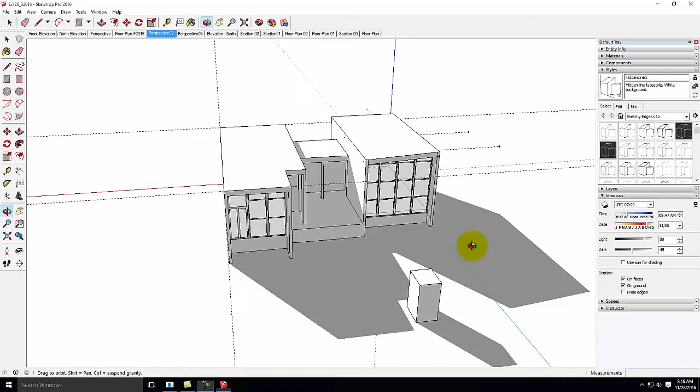So today we're going to start talking about doing sections. And sections essentially are critical because we're going to slice through the building in some key way to show relationship of spaces. And all too often as young designers, architecture students, etc., you focus on the plan. It's easy to conceptualize the plan. It's easy to count the square footage of the plan.

When I asked you all to design a building, your cabin, this building, the first thing that you did was draw the plan, correct? Okay, so it's automatic that you think that. The further along in your architectural career you go, the more you actually start designing in section rather than in plan. And it seems a little counterintuitive because you're like, whoa, wait, why would I do that? I need to know where the spaces are and how they lay out next to each other.

And of course you need to know that. But what sections do is they show us as architects what it's like to be in a particular space. We never experience a building from a plan perspective. We don't think about that part of it. If we're standing in this room, for example, we see the section of the building. That's the kind of spatial relationship that we have.

So if you have a building that has an overlook from one level down to another level, or one level out to a view, or something like that, showing that particular room or the ceiling height is critical to really understanding what it's like to be in the space and what it's going to feel like to be in the space. So section drawings are really one of the most critical drawings you can show in an architectural design or a presentation. Those are the ones that your reviewers are going to care about because they explain what your building feels like to be in.

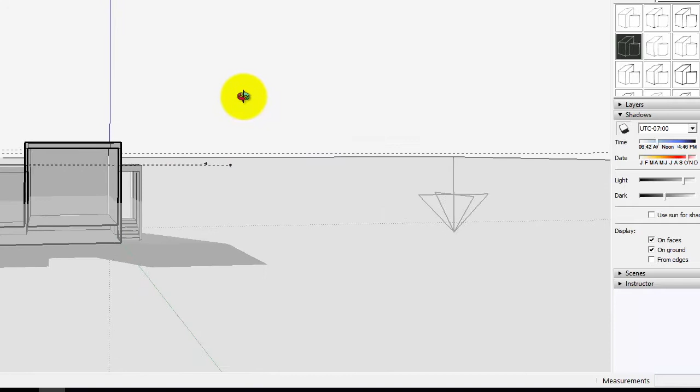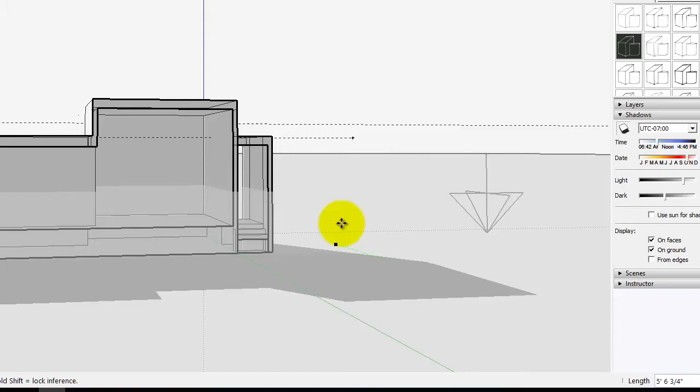Okay? This particular section view certainly gives us an understanding of this side and the main room, living room on that side of the building. If I move that section back a little bit further, it would cut through the hallway, and we get an idea that the main room is connected to the hallway, which is then connected to the room. But I also end up with some kind of awkwardness over here because it's cutting through a closet. It's not really showing the building. So you have to think very carefully about where in the building you want to cut.

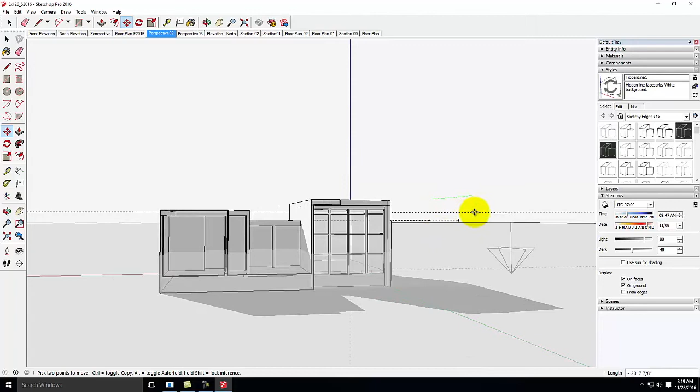Right? So there it's the kitchen, the bathroom, and the bedroom. Okay? Again, not that exciting. Okay, but not super exciting. And I could pull myself back out to find some happy medium, so maybe something like this. This wouldn't be a bad place to try a section. Sometimes it takes more than one section to decide which one's right. So I'm going to delete that one for a second. Maybe not. And I'll try it again. I'm going to go ahead and delete. Well, we'll leave the plan section there for a second.

Let me try taking the section the opposite way. All right, so let me take the section, and this time I'll move over onto the back, and I'll take the section looking this way. Let me go ahead and move this section toward the building. Okay, so now in this context, we're seeing out toward the view here. We're cutting through the stair, kind of the entry level. That's kind of an interesting piece of the building. We're still cutting through the bathroom, but we're seeing part of the bedroom with the closet. So this could end up being okay.

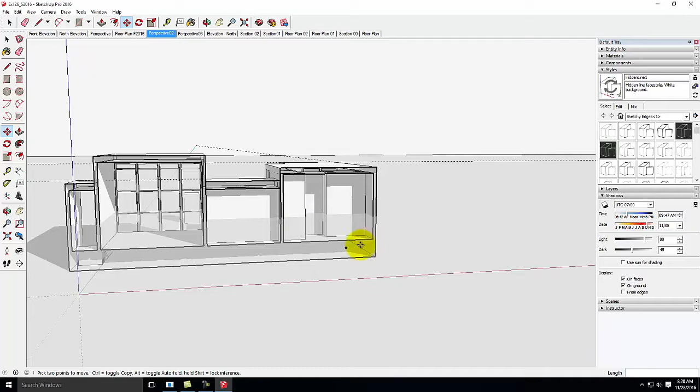Now, I don't have all the detail. I don't show the closet there. So if I had more detail, this section would be a little bit better. So just by flipping the direction, which way I'm looking, this section starts to be a little bit more interesting. Okay? If I pushed it forward still, we could get to a place where we're seeing the bedroom. Let's see, right there. We're seeing the bedroom part here, and we're seeing the main room here. But we really don't have much of the main room left. No room for furniture or anything like that. So it might not be the ideal place to put the section.

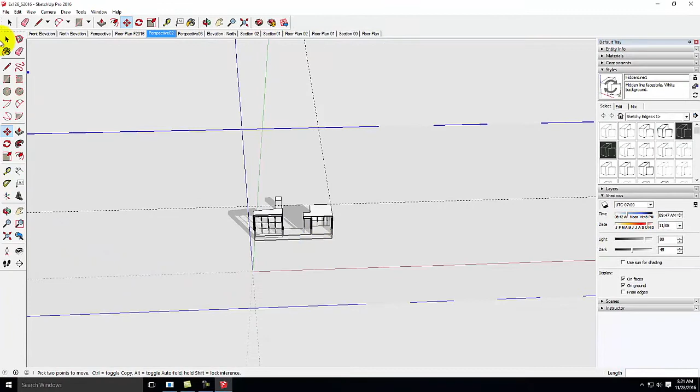I could also take my section sideways through the building. So let me go ahead and pull this sideways. And one of the nice things about SketchUp is we can dynamically go through and decide where this section is going to be. In my opinion, Rhino's a little bit better at doing sections.

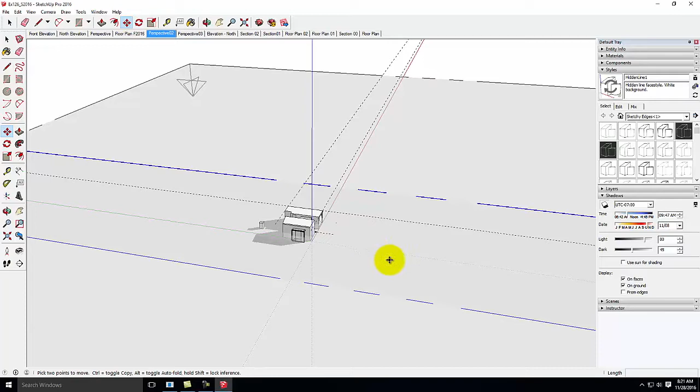They're a little bit more complicated, but you don't get this live preview as you cut through the building. And the live preview, certainly at an early design level, can be very useful. So here in this context, we're cutting through the building, and we're seeing there's my whole living room. Right? Now we're cutting through that bathroom and hallway, and then we can end up in the two bedrooms, looking at the two bedrooms. Okay?

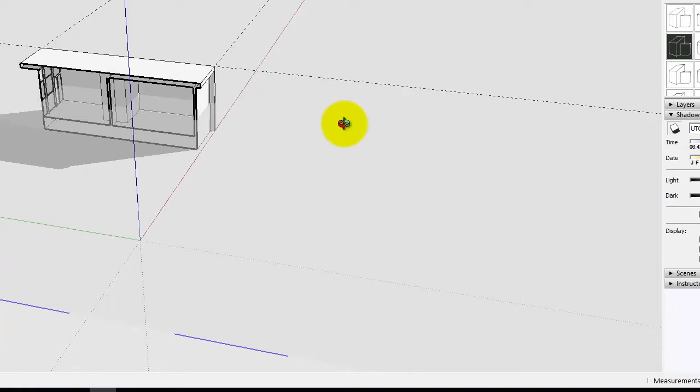So maybe something like that is going to show us the relationship of the two bedrooms and how they work together. So when you're thinking about your section, you want to move around and you want to think about which section is the right view, which is the one that I want to show in the context of this building. So let me move back a little bit, and I'll take a section through the main room like this as an example section. Okay? And again, I'm picking this rather arbitrarily, but you could pick a different section.

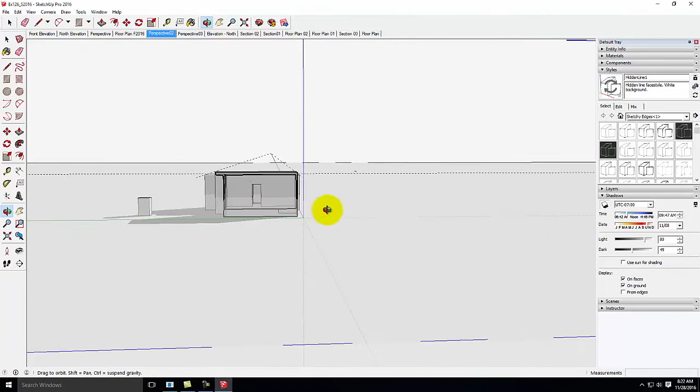You can pick it in any direction you want. I wanted to pick one that was distinctly different than the elevation view for the demonstration purposes. Okay? So I have this view, right, with my section set. Remember, currently it's still in perspective. So I need to make sure that I go up and change. Let's go ahead and turn off my section planes so that it's all white.

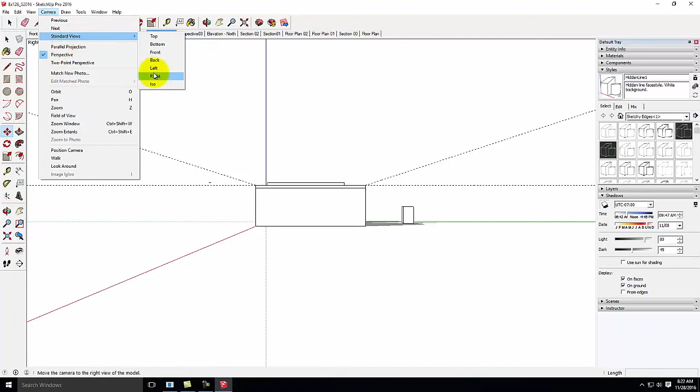And then let me go to my camera, standard views, and I can go to my left or right view. And I forget which one it's going to be. It's probably the other one. Let's try the right view here. Oops. There we go. There's the left view. Okay, let me also change from perspective to parallel projection so that it is, in fact, a true elevation view. And we'll zoom in a little bit so that we can see my whole building.

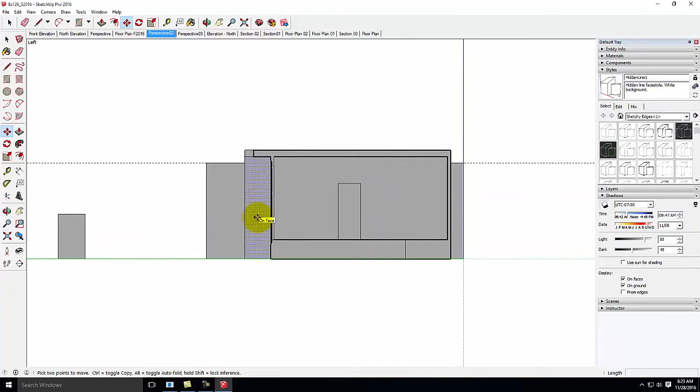There. This piece over here really doesn't matter. That was holdover from when we cut the plan, so I'll go ahead and get rid of that piece. And now we have my building and my section. Now you see that I struck out on this the part about doing the section cut face because it's not installed on your computers and you can't install it without admin privileges. So we're going to skip that part of it, and we'll do it in Photoshop after the fact.

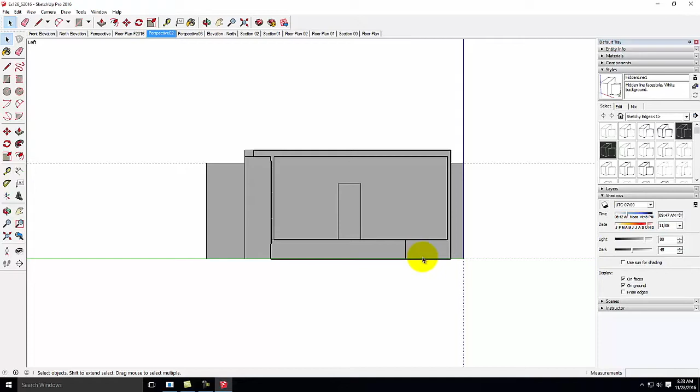OK, so I have this here. I'm going to go to View again. I'm going to turn off my shadows so that I have no shadows. I'm going to go to View. I'm going to turn off my axes. And I'm going to go to View, and I'm going to turn off my guides. So all I have left is just my plain basic lines drawing. This should look very familiar to the things that I've done before. And I'll go to File, Export, 2D Graphic.

And we'll save this into today's folder, which is what? 126. This would be fall of 2016. And this is underscore lines. I'll click on Options and make sure it's still set to be large, which it is. In your case, it may or may not still be in that size. I'll go ahead and say Lines, and then Export. So now I have this.

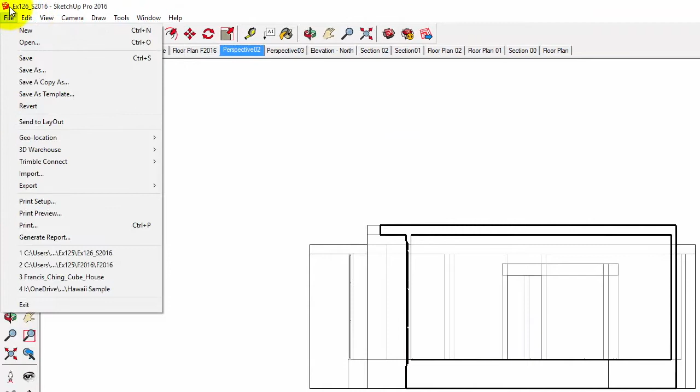Now in this view, the X-ray may be beneficial because we see more of what's happening beyond. So I'm going to go over to my View. I'm going to go to the Face Style, and then click on X-ray. And we see a little bit of what's happening beyond in the building here. We'll go ahead and go to File, Export, 2D Graphic. And I'm going to call this one X-ray. And export. We'll turn back off the X-ray view.

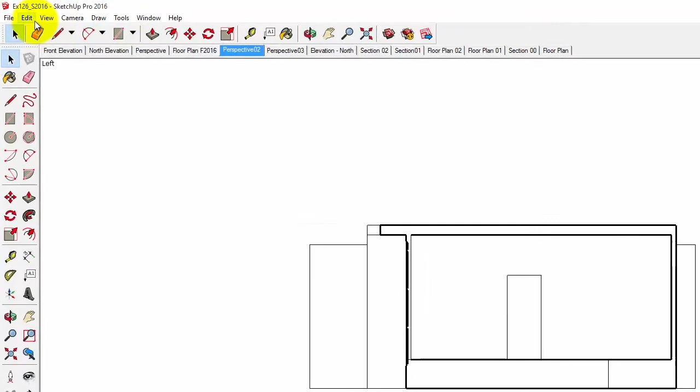And I'm going to turn on the shadows. So we'll go to View and then Shadows. There. And remember, I may want to adjust the time of day or the time of year to see if I can get a shadow pattern that looks interesting. Okay? So something like this looks pretty interesting. The problem is that these windows are cast because I've cut this half of the building open. Right? So realistically, that wouldn't be in shadow.

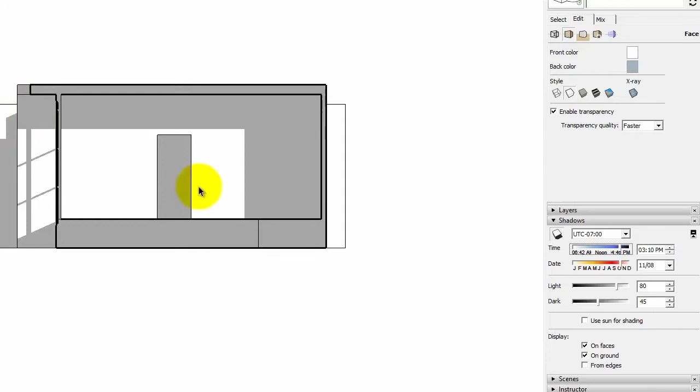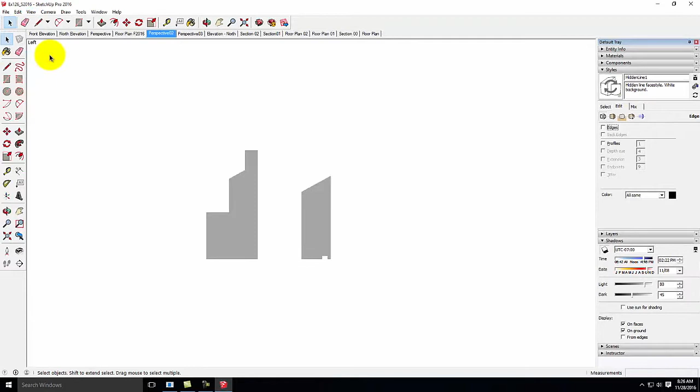The rest of this would be in shadow. So it's not bad, and it's certainly better than it was before. So maybe something like that will look pretty good with this little pattern on the wall. Okay? So then I'll go back to my edge settings over here. I'm going to turn off edges. And let me go to View. And I'm going to turn off section cuts. Hold on a second. I want to see that again.

Yeah, I'll go ahead and turn off section cuts. This piece isn't going to matter. This is the shadow that I'm interested in. And I'll go ahead and go to File, Export, 2D Graphic. And this is going to be Shadows. Click Export.

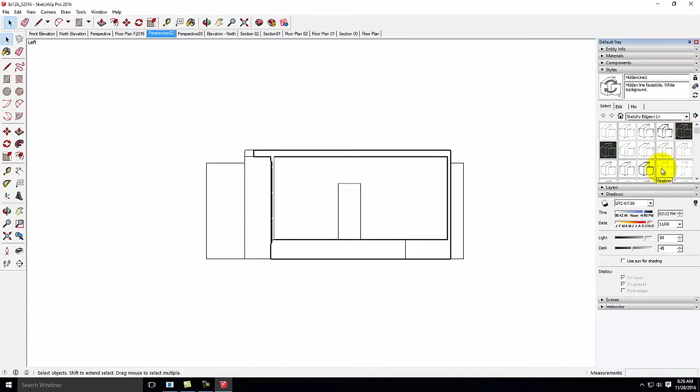Let's turn back on my edges. Turn back on my section cuts. There we are. And now I'm going to go back and turn off the shadows. So we'll go to View, and I'll uncheck Shadows. And we'll go back into my sketchy edge styles. And we're going to pick the pen gray right there.

But I do have to go back and uncheck section plane. So it goes white again, and then uncheck the guides. There it is. I'll go to File, Export, 2D Graphic. And this was my pen gray. Export.

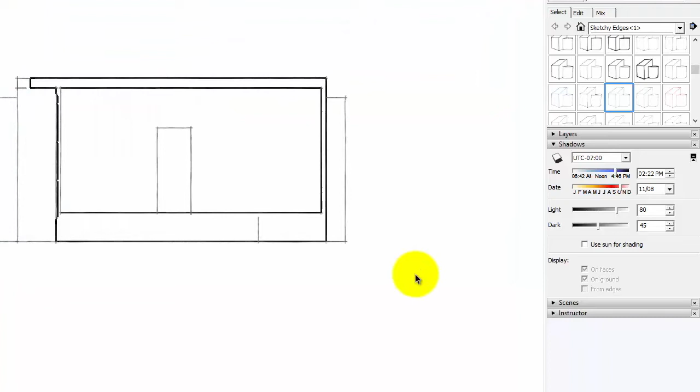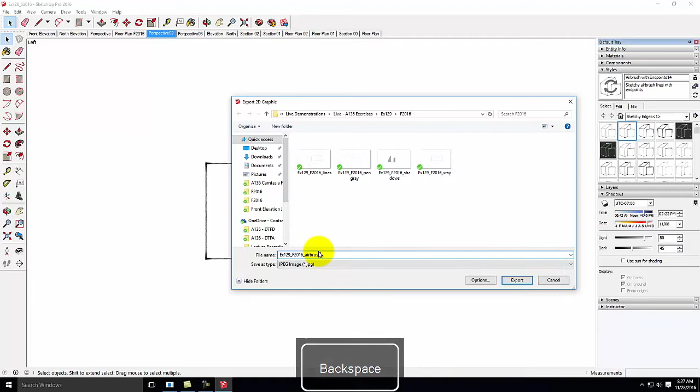And then I'm also going to use the airbrush with endpoints right here. View, uncheck section planes, uncheck guides, and File, Export, 2D Graphic. So this should seem very routine by now because we've done it over and over again. Oops, this is airbrush. And I'll export that as well.

Now I did do one that was colored early on that may help distinguish the background or the foreground. I actually don't like that one. Let me go back to default styles. Yeah, something like this. This is just going to allow me to help pick certain regions.

So let me go back to Edit, edge settings. We'll turn off the profile so we have just the colored regions. Let me turn off the guides, the axes, and then I'll export 2D graphic. And we'll call this one color. And that could just help me select, say, the sky versus the ground, or something like that. OK, so all of those are now done and saved.

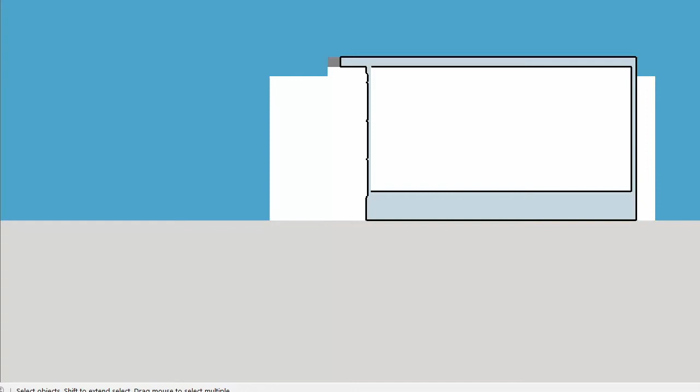Now I'm going to move over into Photoshop. So let me go ahead and open up Photoshop here. All right, Photoshop's open. We'll go to File, and then Open, and I'll open that first line drawing. Right there as lines. Open. There it is. And then we'll place in everything else.

So I'll go to File, Place, and we'll bring in the airbrush. Confirm, File, Place. We'll bring in the color. Confirm. File, Place, bring in the pen gray, we'll go File, Place, bring in the shadows, File, Place, and we'll bring in the X-ray. OK, so I've dropped all of those there. All of the layers have shown up here.

I'm going to spend a moment and do a little bit of organization. So let's take the airbrush and the pen gray and put them up top. The X-ray, the shadows, and the color can be down the bottom. I'm going to right-click on the locked background layer and say Layer from Background, so that it's a live layer instead. And then I'm going to go through and rename these.

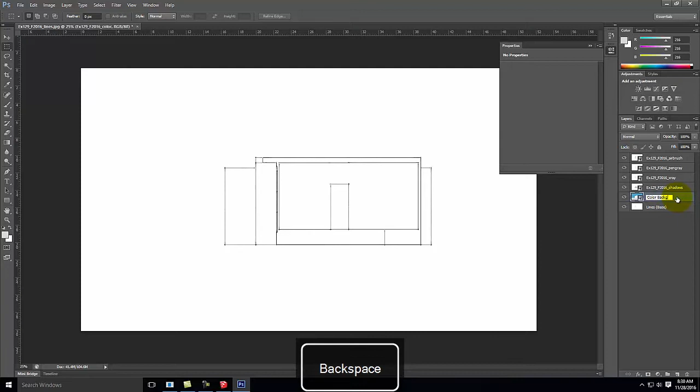Remember, when we start to have lots of layers, it's helpful if I have named the layers so that I can easily go through. So let's go ahead and call this one Lines. And then we can rename these other ones as well. So this would be Color. This would be Shadows. This would be X-ray. Pen gray, and airbrush. Just easier to see those names.

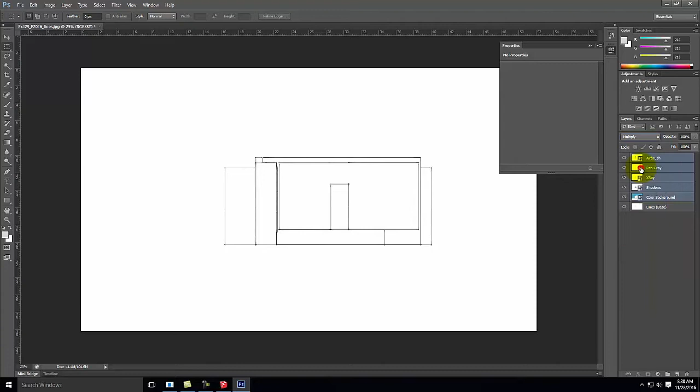OK, so now airbrush through colored background, all of those need to be changed to be multiply, so that we're going to shine through and see all of them as semi-transparent. We'll turn off the airbrush and the pen gray. Let's turn off the color for a second, and let's start with just the shadows view.

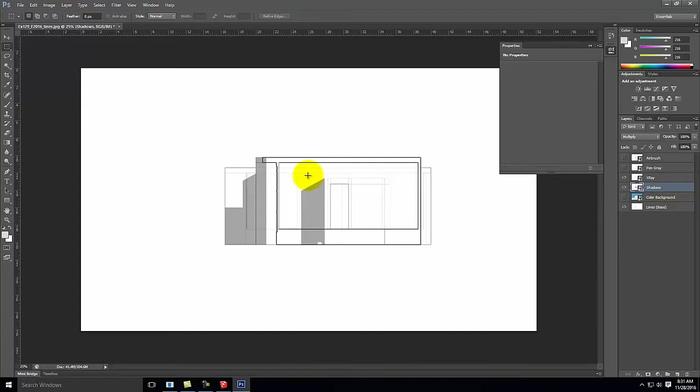OK, so with the shadows, we have to make a few corrections on the shadows layer. So I'll make sure that shadows is highlighted here. I have to get rid of that piece, because obviously that shadow doesn't exist. It's a smart object, so before it's going to let me, I have to right-click and say Rasterize Layer. And then I'll be able to get rid of that piece. Then I also, press Control+ here for a second, I need to fill in this shadow into this area right there. So we'll make a little selection.

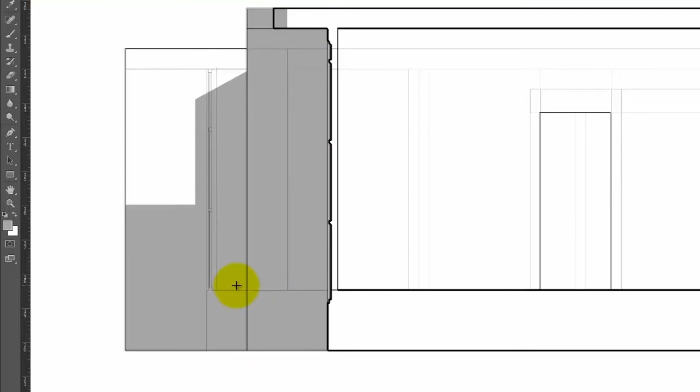I'm going to use the paintbrush tool, but I need this gray. So I'll use the eyedropper tool to select that color of gray. Then I'll switch to the paintbrush, and I'll paint that piece in, because all of that is under the same little bit of shadow. I can also get rid of this little piece right there, because that little piece is part of the section cut.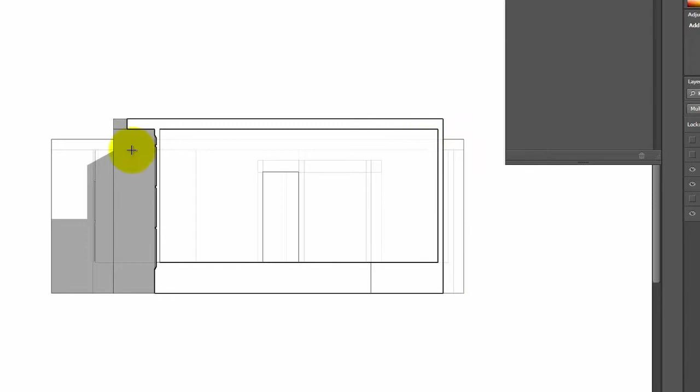Okay? So now I've corrected the shadows, because that was an easy stage to correct the shadows. I don't have any shadows on the back half of the building because of the way the sun is shining, but I do have them right here on the front half. So that's good. And I can come back and do a dodge and burn on those shadows and touch them up. But I want more in the drawing before I worry about that just yet.

So let's think about how the building hits the ground. And so in this sectional example, the ground becomes very important. And I have the building currently kind of floating there. So we need to adjust that. So let me go ahead and create a brand new layer. And I'm going to call this layer Ground. And we'll move it up to the top of the layer stack so it's in front of everything else.

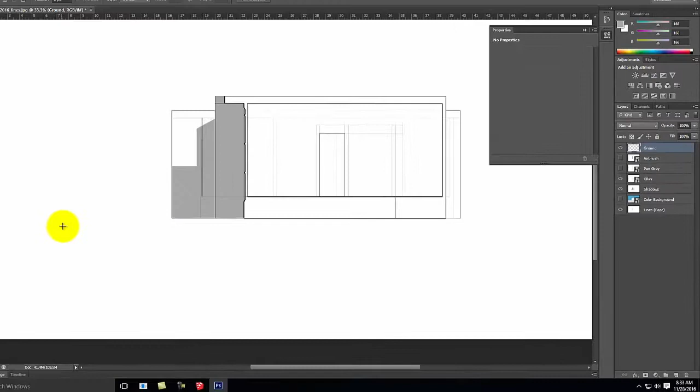So because this is kind of on a hill, I need a kind of a natural slope that's going to go down here. Furthermore, I have enough of a foundation in the building to where it's going to be higher in the back and slope down toward the front. So I need to go ahead and make a selection for that. And I'll use the lasso tool right here to go ahead and draw that. Let me zoom out a little bit so I see everything.

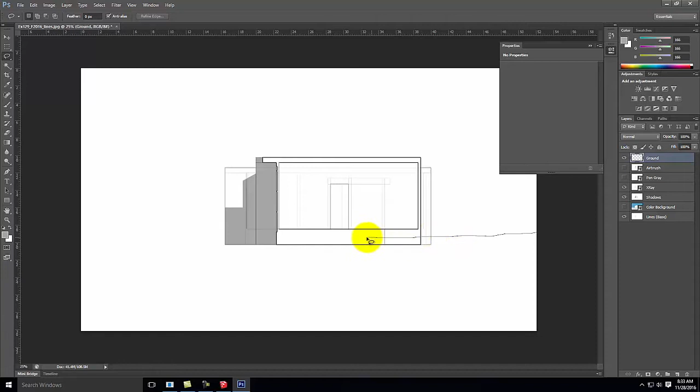And I'm going to start over here on the side. And I'll draw a line that goes along here that slopes down. And then I'll draw it all the way around the border and wind up right back there. So I end up with that kind of sloping line that's going down. And you see how it kind of slopes its way down. That's what I want.

Let's go ahead and paint that in with a color. So I'll use the paintbrush tool, and I'm going to paint not with the gray, but with a much darker gray. Actually, let's go all the way to black. Okay? And I'll go ahead and I'll paint that in as black at the bottom here. We can always change that to be a different color using one of the adjustment layers after the fact. So I have that nicely filled in.

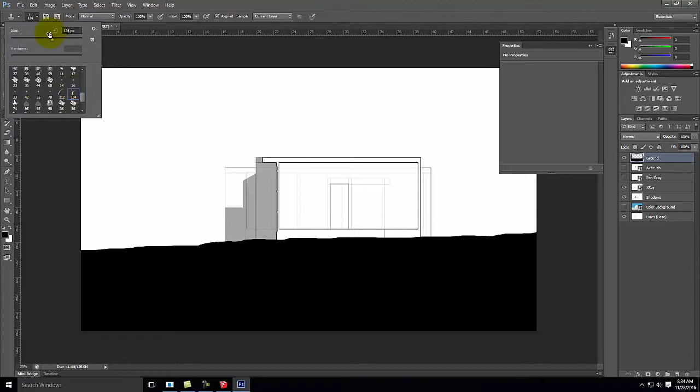That represents the ground. But once again, I'd like there to be a little bit of texture on the ground. I'd like there to be some grass. So I'll use the grass brush using the clone stamp. My grass brush should be right there, 134. And I'll probably have to adjust the size a little bit. So let me zoom in.

Now remember, as I do the grass brush, I hold down Alt to copy from, and then we start. Looks like my grass brush needs to be a little smaller, and then we can go ahead and start to create the grass that's here. All right, I may have to reset by holding Alt where I'm copying from. There we go. Let's move up toward the building.

All right, so I'm not going to worry too much about what's happening in the building here, because remember, I'm cutting all the way through this building. So because I'm cutting all the way through the building, I'm going to go ahead and just skip over to the next side of the building, and I'll do this last piece of grass. So let me hold down Alt, and once again, we'll copy along here. Like that.

And we're working our way up into the building here. Let me hold down Alt, copy from over there, and we'll finish this off. Right, like that. So I make sure I go all the way to the edge. And there may be a few little pieces that you can go back and touch up a bit. Let me press Control-0 so we can see the whole thing. And that essentially softens up the ground quite a bit and makes it feel like it's part of a natural field or something.

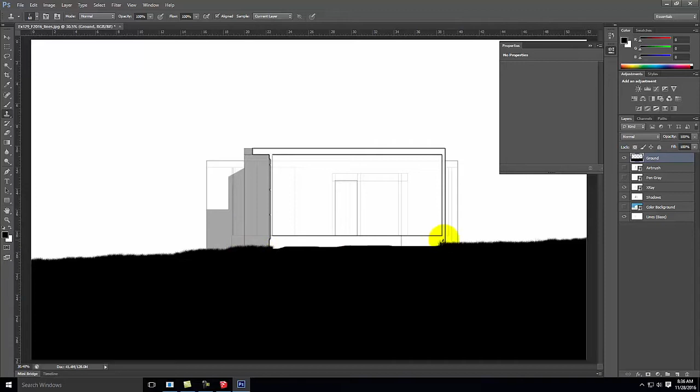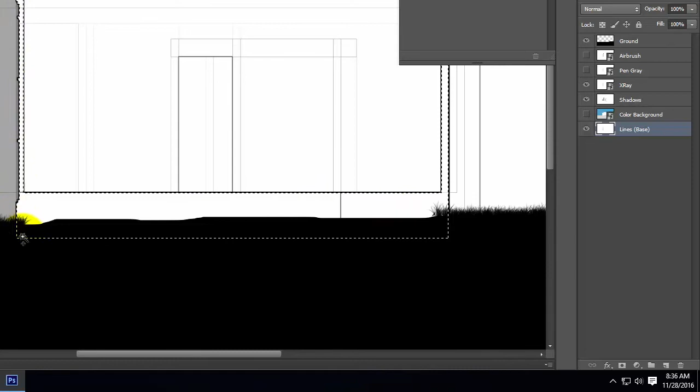Now, because I've cut through the building, I want to apply the same black bottom to the cut of the building. So let me go ahead and I'll use the magic wand, and I need to make sure that I'm on the base lines layer here, and I'll select the inside of the section cut. I'll hold down Shift. I've selected all of the inside there. I'll move myself back up to the ground layer. I could also create a brand new layer for clarity and call this section cut.

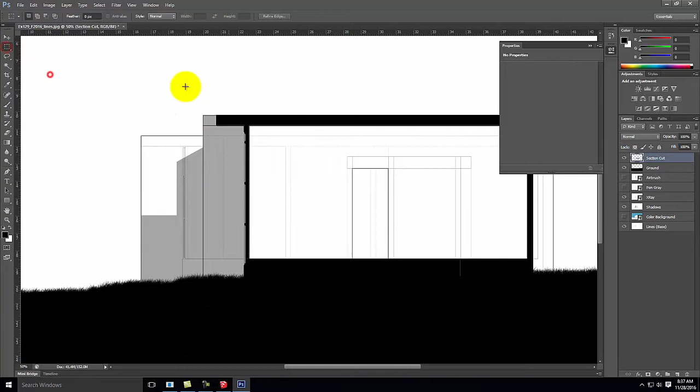And I could then paint inside the building here as black. So now if I step back, Control minus here, we can see that I'm really identifying what's been cut through with this dark black color. Okay? And it's possible that the black ends up being a little bit too strong, but remember, we can apply a hue and saturation adjustment to change that black. I'll show you that here in just a second.

Let me go to Layer, New Adjustment Layer, Hue and Saturation. Okay, all I have to do is on this lightness scale, I can adjust and make that gray to black, whatever the right value is. Okay? Now, this happens to be applying to the whole layer stack. I can tie it to specific layers if I wanted to, remember. Control-Alt-G ties it just to that one layer.

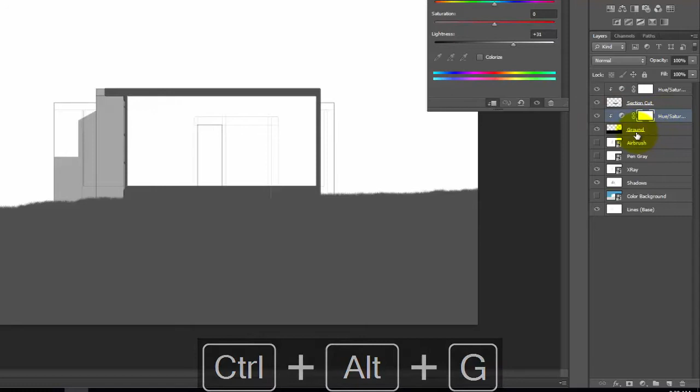I could duplicate this layer, and I could apply that, Control-Alt-G, just to the ground layer as well, if I wanted to. Does that make sense for how I made those changes? For right now, we'll go ahead and turn those off so that we're back at the black layer, and we'll keep working from here. Okay, so I have those already established nicely. I have my shadow established the way I want.

Let's start to think about what the inside of the building is going to look like. So in this context, the inside of my building is a concrete wall. At least that's how I envisioned it. So I'm going to go ahead and find a concrete texture to put as that wall. So I'll go online. Let me open up Chrome here and search.creativecommons.org. I'm going to do a Flickr search for tiling concrete texture. And we'll see what I come up with.

Okay, so maybe something like this. This happens to be some stone tiles, but it might look good on the inside of the wall. Okay, we'll use that as an example. I'll go ahead and download this in the original size. Let me show it in my folder. Let me copy it and put it into today's folder. Go ahead and paste this. There it is. I'll go back to Photoshop.

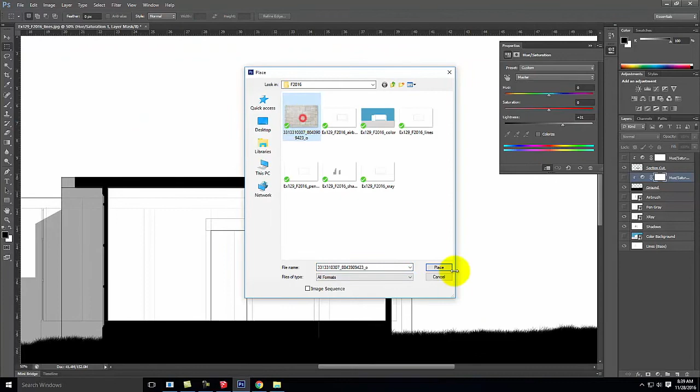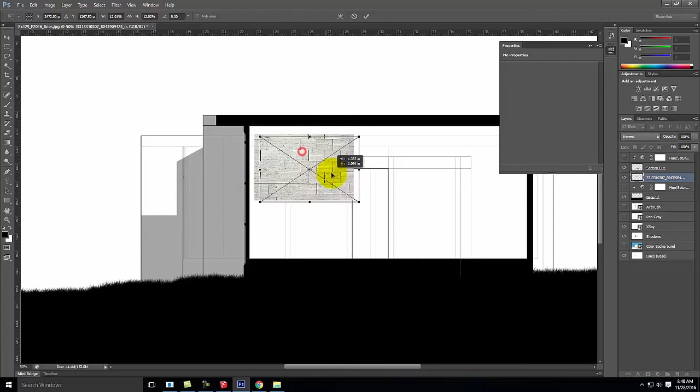I'll go to File and then Place. And we'll drop that into my building here. Obviously, significantly too large, so let's make this smaller. I'm holding down Shift to keep it in proportion. And let's zoom in a little bit. And I need to make sure that the scale feels right, so that those tiles aren't too big. So it's maybe something along those lines. I'll go ahead and say OK to confirm, and there it is.

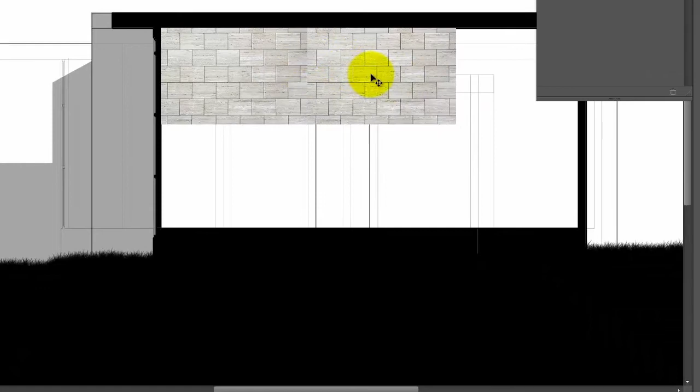I want this to tile and to repeat on itself. So as long as I'm on this layer, I'll use the rectangular marquee and drag a box around my tiles. It just needs to be larger than the tiles. I'll go to Edit and then Copy, and then Edit and then Paste, and I'll get a second copy of that image. We'll bring them together so that they tile, and it doesn't look like these are the best tiling images because the colors don't quite match. But we'll go ahead and pretend that it's OK.

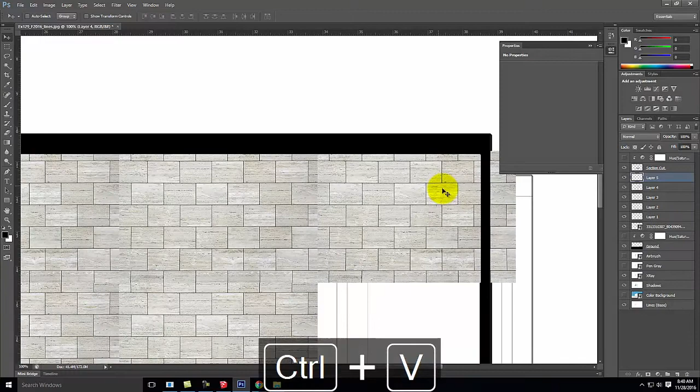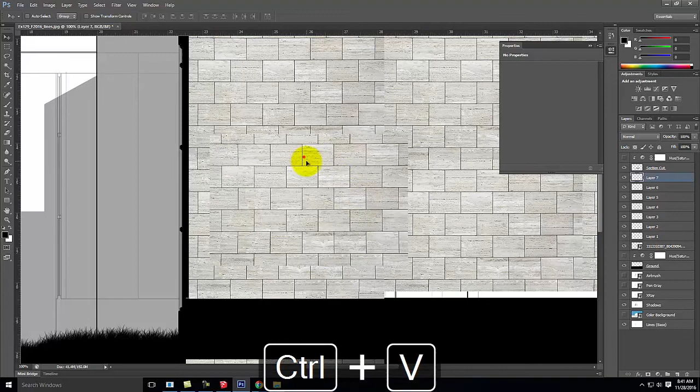Drop that there. Drop that there. And we'll drop this one right there. Okay, so I'm not a huge fan of how those look, but they'll work for what I'm trying to do. Okay, so I have those 6 images placed. Oh, looks like they're not quite tall enough, so I need a few more. There they are.

And you see that it created a bunch of layers. I want all of those selected layers to be merged into one layer. So I'll go up to Layer, and I will go to Merge Layers, which will take all of those and make them one layer. So now that they're all one layer, I'll rename it Tile Background. And then I need to establish a mask on this layer so that these are cut out. So let's turn off those tile backgrounds. We can turn off the section cut.

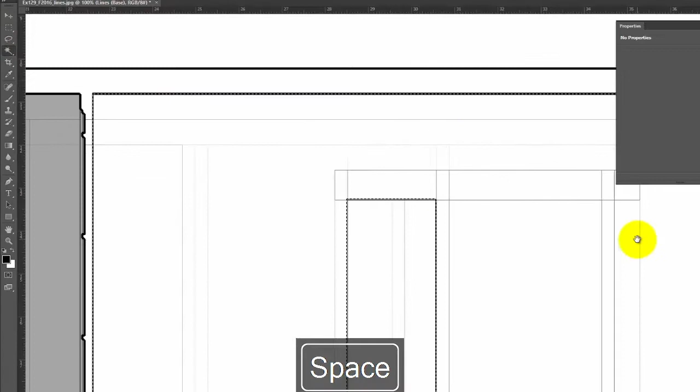We can turn off the ground. Let's move the tile background there. Let's go on the lines layer. Let's go ahead and use the magic wand to select the interior region, which is right there. Once it's selected, I can go back to the tiled background layer, turn it on, and click the Add Layer Mask button. And it will then cut out the image that I have for the background, something like that.

So if I zoom out a bit, we can now see that background, and we can turn on the ground and the section cut so you can kind of see what that's looking like. Okay? Now maybe this is a little bit strong, so let me go on the tile background layer. Let me go ahead and just adjust the opacity down a bit. I have to do it a little bit for what it looks like on the screen rather than what it looks like on my screen here. Yeah, maybe something about like that. So now I have that piece there as well.

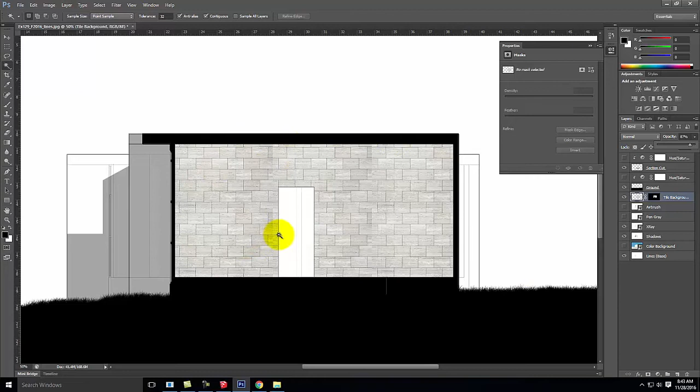Okay? Now, maybe I want to mimic what it would look like to have some lights on in this building. Maybe I want to show what those look like. So I'm going to go ahead and create a new layer here. It needs to be on top of this tile background layer. And I'm going to rename this layer to be lighting. So I have the lighting layer active. Under the blending mode, I'm going to choose soft light. It's one we haven't used before, but I'm going to go ahead and use soft light.

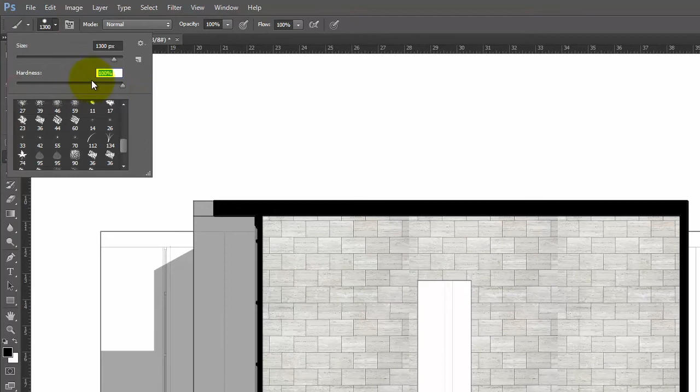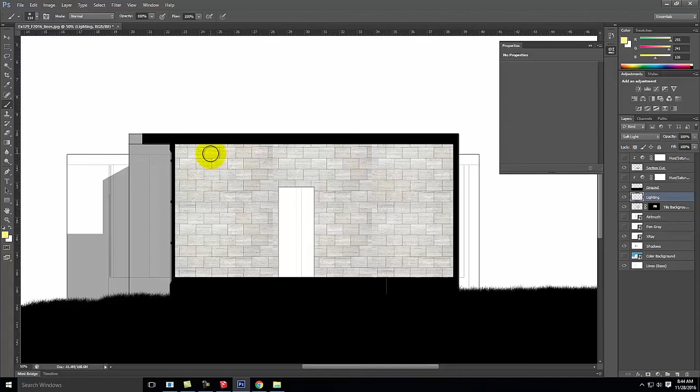And then I'm going to use a brush. And that brush needs to be very, very soft. So sorry, it needs to be all the way here at 0%. And the size obviously needs to be smaller. Then I'm going to pick a foreground color of kind of a yellowish color. So maybe something like that. And then I'm going to start up here by the roof, and we'll do just a single dot. And I'll come down a little bit, and I'll increase the brush size, and I'll work my way down the wall. I'm just hitting the bracket key as I do this to slowly kind of wash the light.

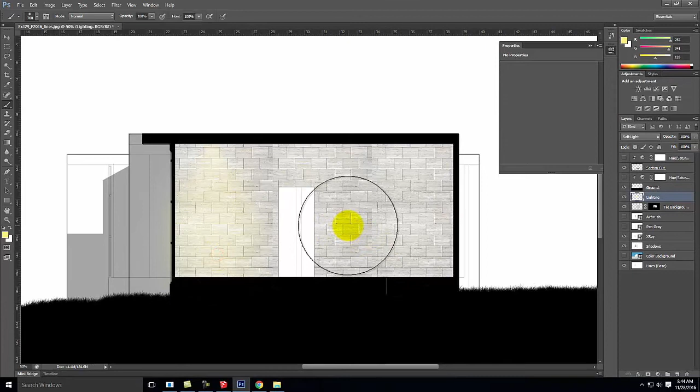And I don't know whether, can you guys see that a little bit? It's really hard. Let me darken the background here, and let me duplicate. Okay, maybe you can see it now a little bit more. Okay, so obviously the background is much darker than I wanted. The key is identifying where the light starts from. Let me go back to my lighting layer. Why are you not changing your size? On the lighting layer.

Right, so the light starts up at the ceiling. We start at a small cone. Then we work our way up as it comes down toward the ground. You guys see how that cone kind of flares out? Because that's what light tends to do. If you look at the back of the room, we have 3 lights in the ceiling. If you look at the wall, see how there's a cone for each light? Right? That same principle happens whenever we create the lighting.

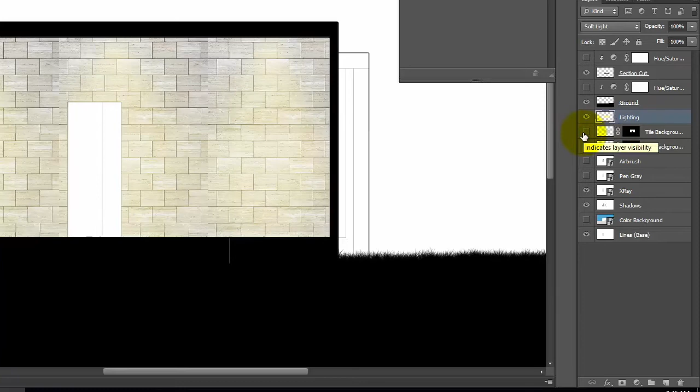So let me do one more example here, right from the center. So we'll start small, and I'll work my way up as I come down. And there we go. So now I have lighting on that back wall. Okay? And again, I deliberately increased the background vibrancy so that it's visible on here. When I do the final version, I'll probably turn that off so that it's a much lighter, much more subtle look.

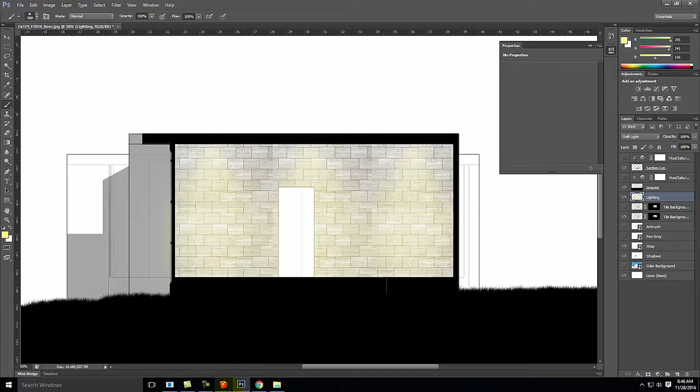Okay? So I now have this. It's probably time to add some people. One of the key elements to creating a good quality section is to put people in it, because that's how we understand a sense of scale. That's how we understand how big a building really is. If you guys remember, we did a bunch of work on the course website earlier in the semester where we cut out people. So yes, I was trying to teach you how to cut things out and do masking, but I also had this in mind so that you could come back and use these and not have to cut them out again.

So we'll go to Resources and then Collage Images. You may already have some available, right? So there's a person here. I can choose, do I want the black and white version, do I want the color version, or do I want the silhouette version? And it depends on the look that you're going for as to which version is really the right version. Right? Let me go ahead and download each. All right, let's put them into today's folder.

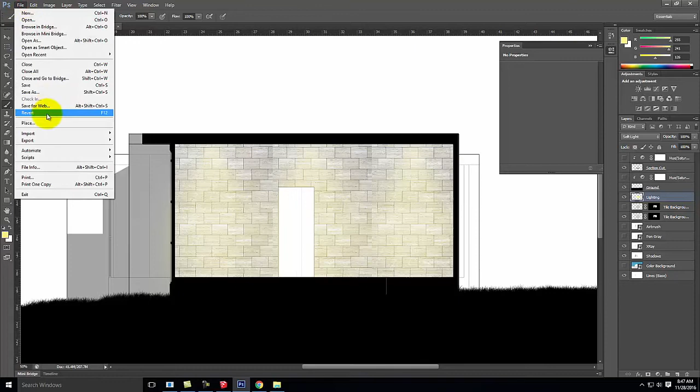All right, so I have all of those, and then I can choose to drop them into this scene. So I'll go to File, and then Place, and again, I have to pick which version I want. So maybe I'll try the black and white version first, right? I know that this is a doorway, so I need to make sure that the person is scaled appropriately for the doorway. So maybe his head should be about there. And we'll make the person a little bit taller. Actually, I think that doorway is a little bit larger than a normal doorway. So that seems about right for the person.

Now I have to make sure, if I look down at his feet, that his feet are at the right place. If he's floating like that, it's not going to work. Right? So I'll move him down so that he's standing on the ground, about like that. Now I picked an image that his feet were pretty close to being on the ground. You have to be careful when you're picking an image that the image isn't too much in perspective. We want essentially an elevation or a sectional view of the person so that they're standing and you're not getting too much of a perspective view.

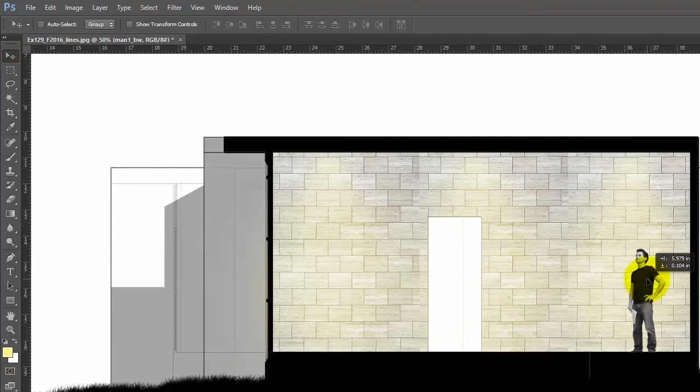So if you're struggling, we'll go ahead and commit to that for a second. There's the person. Seems fairly reasonable, right, standing there. The other option, remember, of course, principles of composition probably dictate that this person should be over here. Maybe something like that. Okay.

If this isn't really looking right, a lot of times you can get away by, instead of using the actual photograph, use the silhouette. Because by using the silhouette, you're taking a lot of the perspective away, and you're now only seeing the shadow of the person. So if you're struggling to get the person to look correct in your view, go ahead and just use the silhouette version. Okay? Again, I can make the silhouette version a different shade.

So let's turn off the first one here, the black and white. I can make the silhouette person black, like the background, by adding an adjustment layer. So I'll go to Layer, New Adjustment Layer, and we'll do a hue and saturation adjustment. I'm going to tie that directly to the man. So Control-Alt-G. And then I will adjust the lightness so that the person ends up being black, which then matches the background. Do you guys see how I did that?

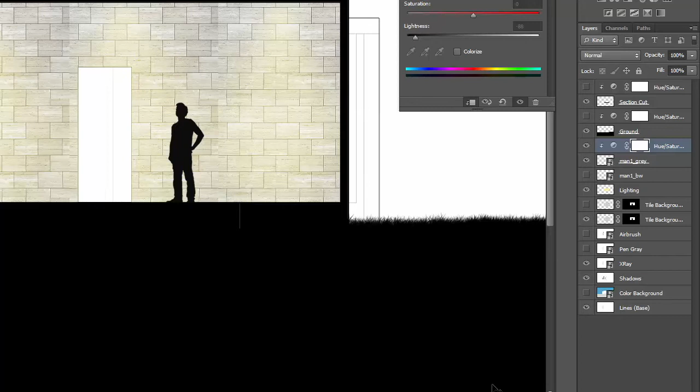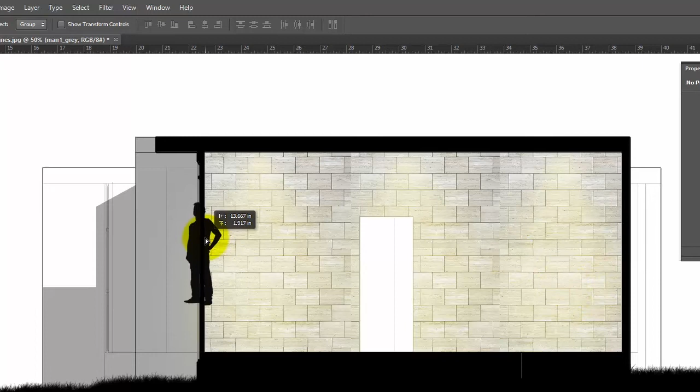Now this starts to feel like it's part of the section cut, which can be beneficial as well. We can move this person, oops, sorry, make sure I'm on that layer. We can move this person over as well. Like that. Okay? It wouldn't make sense for me to have him facing the wrong direction. In this case, I do have some windows, so it might work, but really he's looking toward us more than away from us. So it doesn't quite work in this context, but you want to think about compositionally where he fits as part of the image.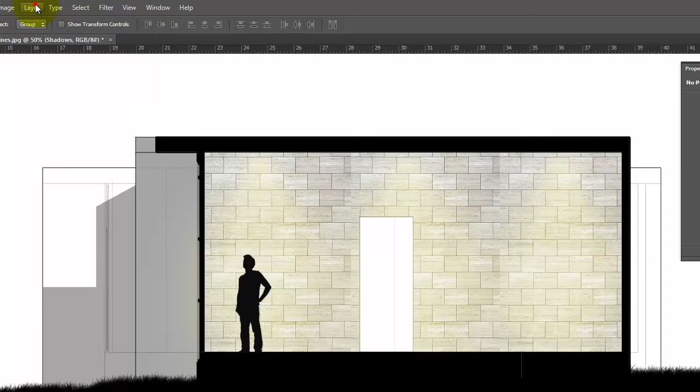Okay? So let's do a little bit of dodging and burning on the shadows layer. We'll come back to the shadows here. We'll do Layer, New Layer. We'll call this shadows D and B. This is going to be an overlay filled with a neutral gray color. And I'm going to tie it, Control-Alt-G, directly to the shadows layer. And then we'll do a little bit of dodging and burning on that. And go ahead with the burn tool here, a little bit larger. We're just going to darken up that edge a little bit more.

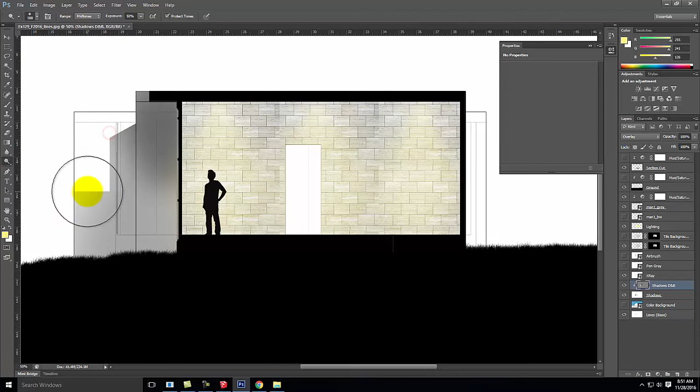Right. Something like that. And we could even lighten up using the dodge tool here. We could lighten up the edges of the shadows just a bit. Something like that. So we just tweak the shadows just a little bit so they're not quite as strong. OK, so I now have those.

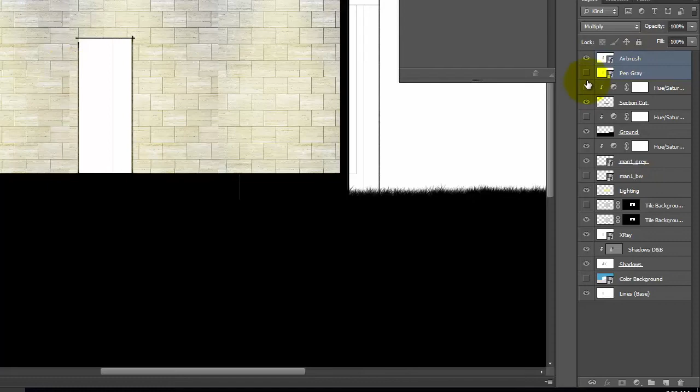I have the lighting on the inside of the building. I have my section cut. I have my people. The last thing would be to add the airbrush and the pen gray, which are the little bit of the stylized version. Let's put the airbrush and the pen gray, however, up on top of the layer stack so they're on top of everything else. Right? They shine over that way. So I just want to make sure that that is part of my overall layout.

By the way, all the steps that I've done are available on the course website under the tutorial section. If you go to Assembly 10.3, SketchUp to Photoshop, this has a bunch of actual images with how they work and what I've done as part of these images. Okay? So we've gone all the way through. The only thing that I haven't dealt with is any kind of background. So I'll go ahead and add the background as the next piece of this puzzle.

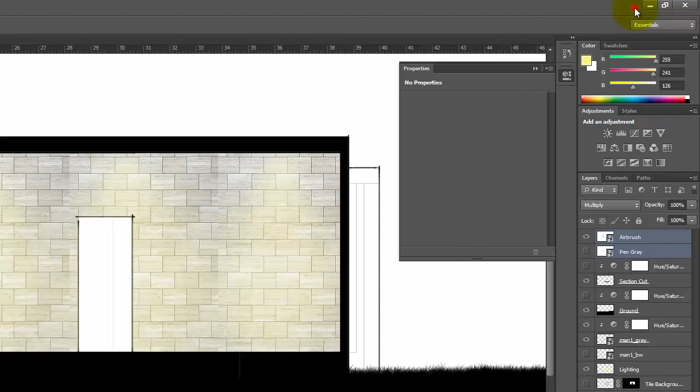Okay, so let me press Control-0. Remember, it's always up to you to decide how much is too much. Right? Do I want the background? Do I want it to live just as a drawing like this? What feels right, what feels wrong. So I'll go ahead and do the background, but again, you decide whether it's relevant or not. So let me go ahead and go online. And once again, I have to find an image that works as a background image.

So let's go and let's look at Yosemite photo. Right? And again, finding the right image is always the biggest challenge. Right? Maybe you want something that has these kind of tree type background. This might work in my context. This log is going to be problematic though, because as it comes out that side, unless I'm covering it up completely, it's going to be hard to kind of work with. So we'll keep looking.

All right, not getting ideas that I like here. Let's try Yosemite Forest. See if we can get something better here. All right, picking the image of the fire, probably not the right image, not quite what you want to have shown. So you want to be careful and really preview what looks right.

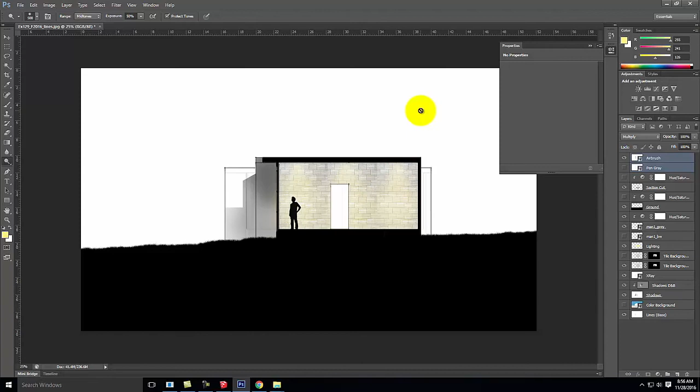So let's go ahead and put that in. I'll go to File and then Place. We'll put that background image in. It's obviously a bit on the small side. We need to make it bigger. So we'll increase the size, something like that. I'm going to go ahead and put it below the section cut. Let me commit to it here. Put it below the ground so that we can see where it would fall on the building. And I need to be a little bit careful with where my ground is and what it looks like.

So in this context, the shadows are going roughly in the right direction for the shadows that I want, but the hill is getting taller here, and it's kind of going down here. So it's not quite the right look that I was going for, but it would probably work. I might adjust it a little bit, something like that. Then we can go ahead and turn on some of my other layers. I need to cut out for the building itself, so I'll turn on the color layer. Let's turn all of this off.

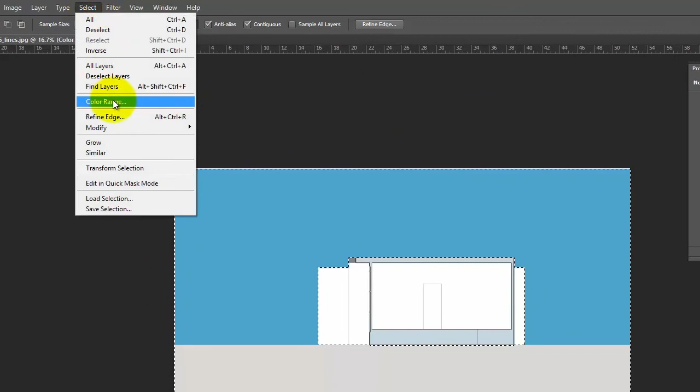So we're back here. Let me go ahead and use the magic wand to select that plus this. Then I'll select the inverse. So let me go to Select, Inverse. I'll go back to my background, and we'll click on Add Layer Mask. Oops, sorry, down here, Add Layer Mask, so that it's cut out. Oops, wrong way. Select, Inverse, Add Layer Mask. Turn back on the ground. Turn off the colors. You get the idea.

Okay. So in that context, it's OK. There might be a better image to use. Let's look at my other images. Nope, too much. Yeah, too much. Oh, none of those really look right. I like that this slopes off to this side, but it's a little bit too far away. So in reality, I'm going to need to spend a little bit more time. This one is too close, right? The tree here would be too close for where the section cut is. So I would spend a little bit more time trying to find it.

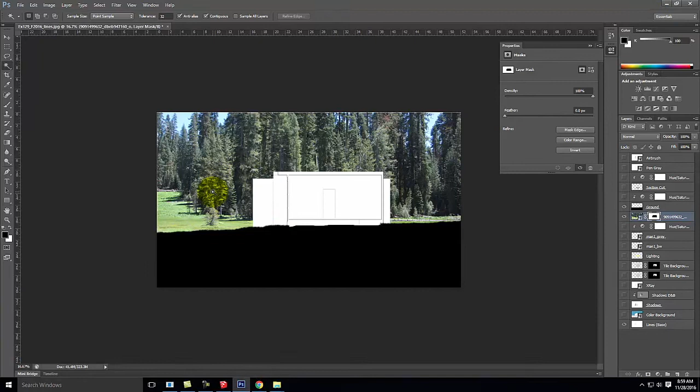If you see on this, for example, those trees feel like they're in about the right context. The fact that it's sloping down here kind of works with the background context. Okay? I think you could actually download those images as part of this. So anyway, I'll leave it as this for right now. The point is I want to spend some time and really think through what's the right look for the background image.

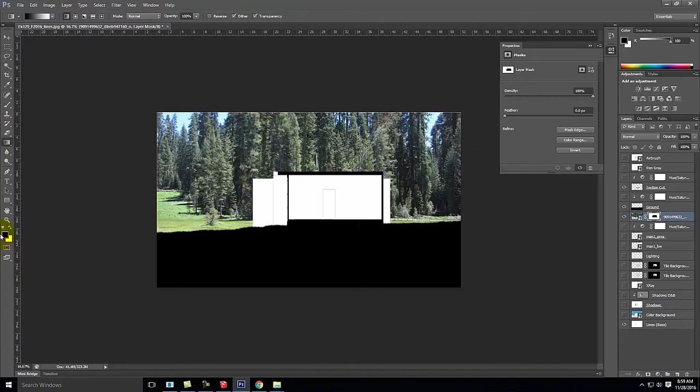One of the things that can be beneficial, though, as well, is maybe you want to have this fade out at the top. So I can go back to this image and work on my layer mask with my gradient tool from black to white. And I can cause the top of the image to fade out a little bit. Now, unfortunately, when I did that, it deleted this part. So let me do a quick magic wand. Use the color background again to select just the background piece here.

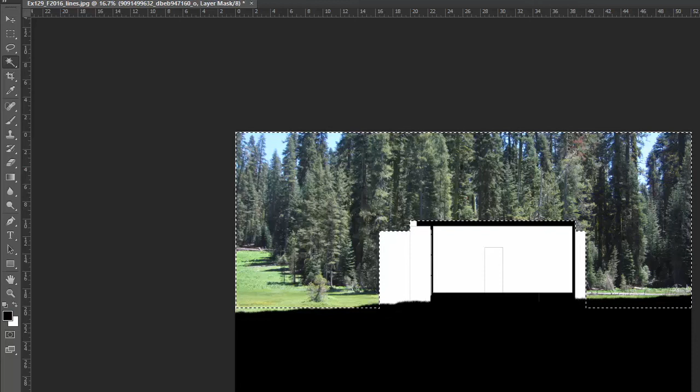And then I'll use my gradient tool to feather the top of the image so that it goes to white rather than to a sharp edge. And this allows you to put it at the bottom of a presentation and not have a sharp edge that defines the section. It fades out, which is a lot of times beneficial. Remember, I can also, if this is drawing too much attention, let's turn on a few other things here. Turn these back on. All right, so I'm trying to get this back to its look here.

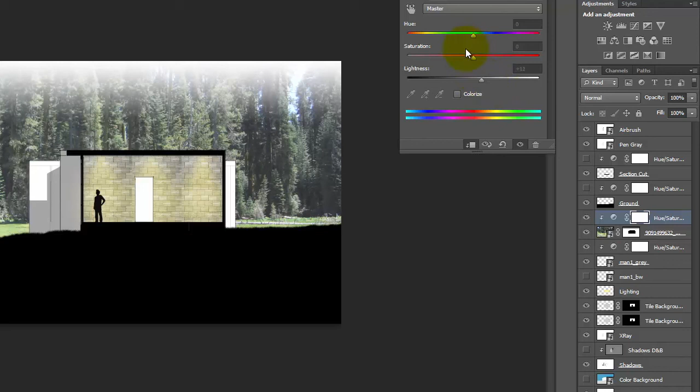If the color is too much, remember I can do a hue and saturation adjustment on the background layer itself. So let me go to Layer, New Adjustment Layer, Hue and Saturation Adjustment. Control-Alt-G to tie it to just the background. And then I could start by just toning down the color. I can make it a little bit lighter. I could also adjust the saturation so it turned more black and white. It wasn't so strong, right? I could also shift the hue to a different hue. I could make it more brown or something if I wanted it to be more like that. So the point is you can play around with a lot of different options for what feels right for your particular image and its background.

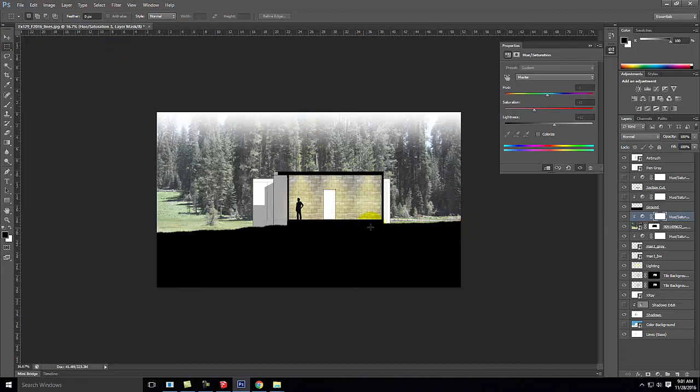All right? So now I've worked my way through. I have the section itself. I've identified the section. I have the ground that's put through. I've filled in the section. I also have a background that's been applied. I have a texture that's been applied. I have fake lighting inside the building. I have a person. It's starting to look pretty good as an overall piece. Looks like I need the dodge and burn shadows back too.

Okay? So today you're going to work through this same process. Obviously it's a lot of repetition to the things that we've done previously, but you can also see where we're going with it. Okay? Remember, this is potentially one of the 4 pieces of assignment 106 that you're going to turn in. You can pick the plan, the elevation, the section, or the perspective. Remember, it's 3 of those 4. So whatever one doesn't turn out well is the one that you don't turn in. Okay? But this is part of your assignment. You get time to work on it today as class.

Are there any questions? No? I always know that this is a lot to take in, but you notice that I've repeated this many times. Okay? And that starts to help it sink in a little bit more. All right, if you have any questions, let me know.